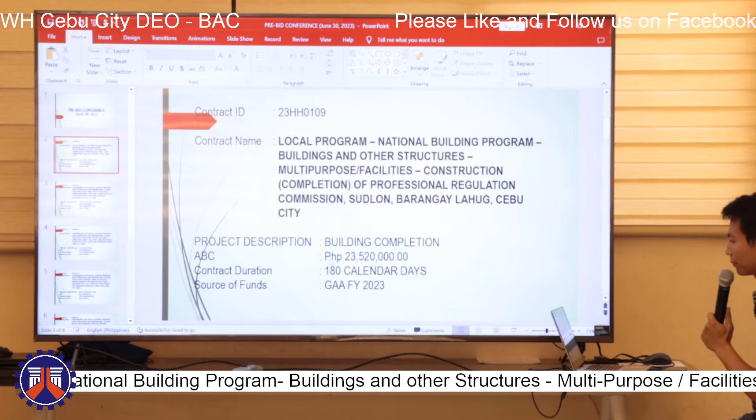Thank you, Ma'am Jared. For the first contract ID for today's pre-bidding conference, 23HH0109, Local Program, National Building Program, Buildings and Other Structures, Multipurpose Facilities, Construction of Completion of Professional Regulation Commission, Sudlon, Barangay Lahug, Cebu City. With an ABC of 23,520,000 and 180 calendar days for its duration.

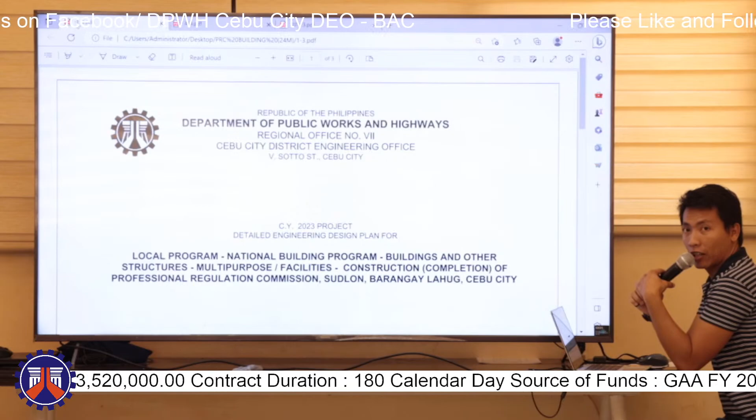The project is located in between the DENR and civil service building at Sudlon. This is the newly constructed PRC building, as of now the scope of the first previous contracts is still ongoing.

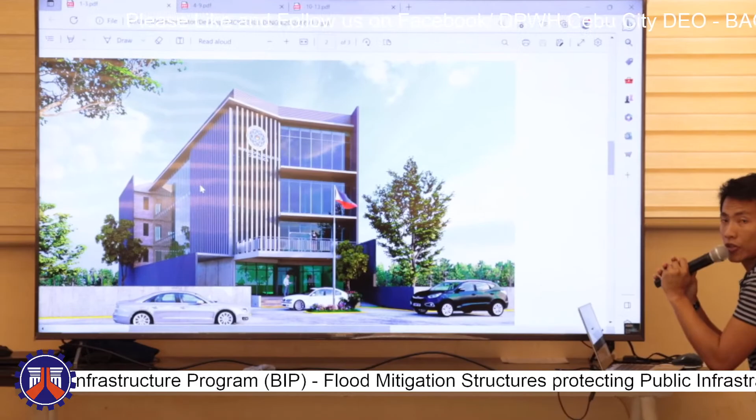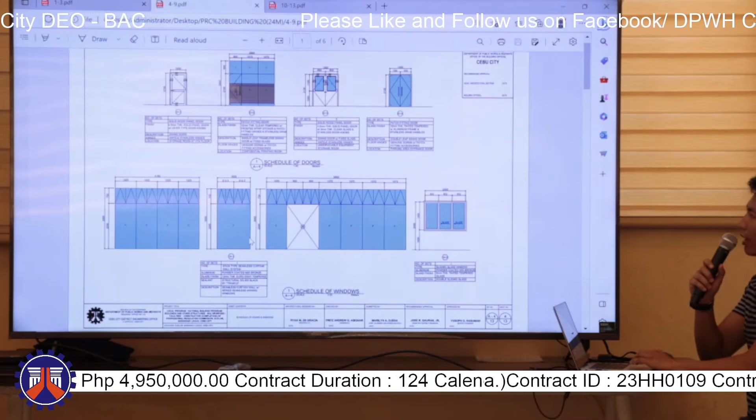So these are our scope of works for the finishing works: fabricated materials for aluminum glass window, sliding type, tempered glass door 12mm, aluminum glass windows for awning, glass wall 12mm, and wooden doors and windows. Let's go through the scheduling of doors and windows. This specifies the description of each door and its proper location.

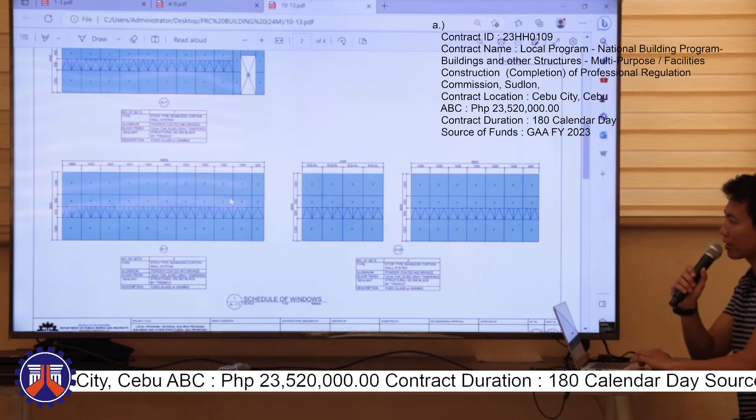Okay, so let's just look at the scheduling of doors and windows. That's it for the first contract, 23HH0109, completion of PRC building at Sudlon, Lahug, Cebu City. The ABC is 23.5 million.

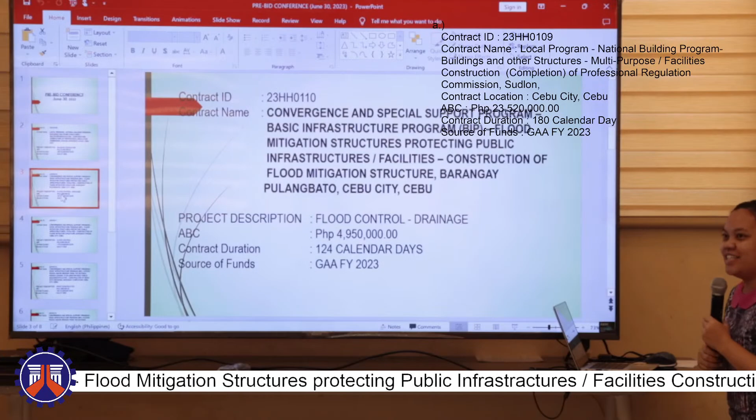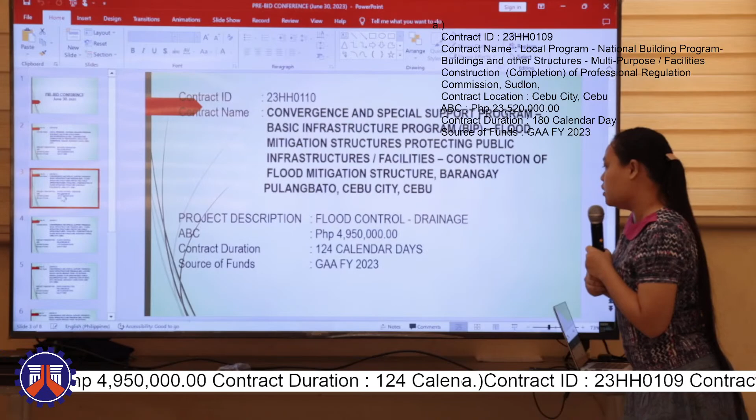Okay, for the next contract ID to be presented by Engineer Luna. Good morning, everyone. For contract ID 23HH0110, Convergence and Special Support Program, Basic Infrastructure Program (BIP), Flood Mitigation Structures Protecting Public Infrastructure Facilities, Construction of Flood Mitigation Structure, Barangay Pulangbato, Cebu City, Cebu. Project description is flood control drainage with an ABC amount of 4,950,000. Contract duration of 124 calendar days, source of funds GAA FY 2023.

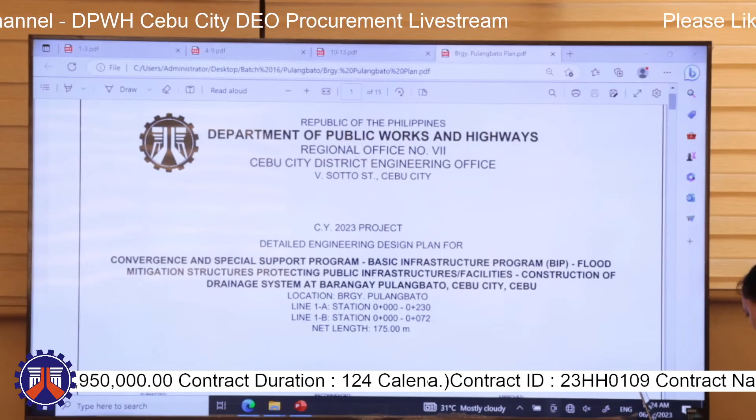So for this project, it consists of two line alignments: Line 1A, station 0 to 230, and alignment 1B, station 0 to 72, with a net length of 175 meters. For the location plan, our project is located along Pulangbato Kandarong Road. The alignment Lane 1A runs along the road, followed by construction of box culvert drainage with steel grating cover every 10 meters.

And the alignment 1B is construction of 48 inches RCPC. This will cross along the Gandarong Pulangbato Road. This 48 inches RCPC will cross there, heading towards the Butuanon River.

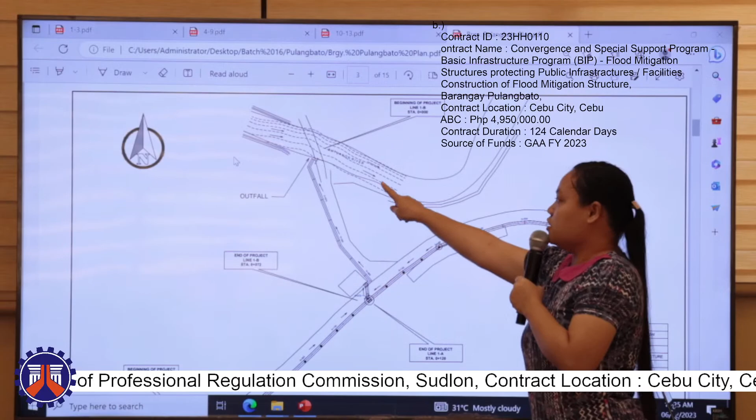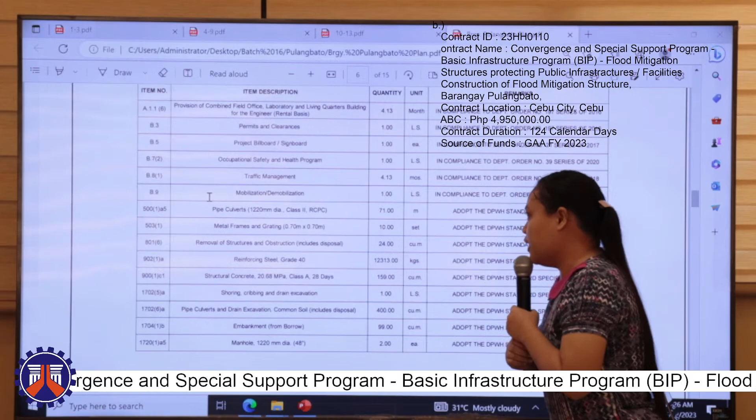For our outfall, to protect against scouring at the outfall, we will have a flared F-type headwall to protect the outfall. So the main quantities for our project in Pulangbato are reinforcing steel bars, structural concrete for the box culvert and steel grating, the 48 inches RCPC embankment, and we also provide shoring for the excavation of the project. That's the main scope of work for the drainage project along Pulangbato.

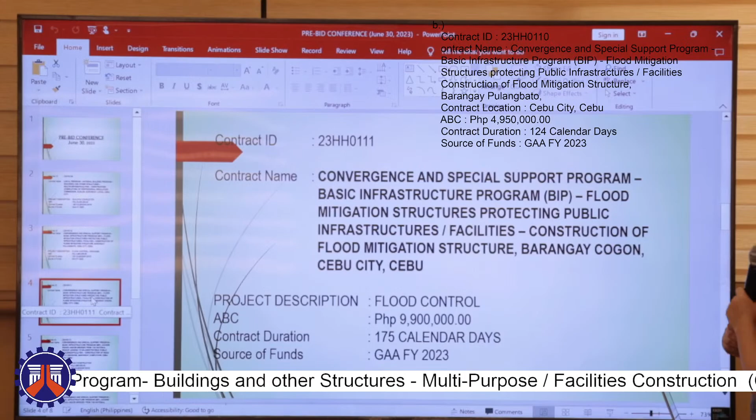So for the next project, 23HH0111, Convergence and Special Support Program, Basic Infrastructure Program BIP, Flood Mitigation Structures Protecting Public Infrastructures Facilities, Construction of Flood Mitigation Structure, Barangay Cogon, Cebu City. Project Description: Flood Control, with an ABC amount of 9,900,000 with a contract duration of 175 calendar days.

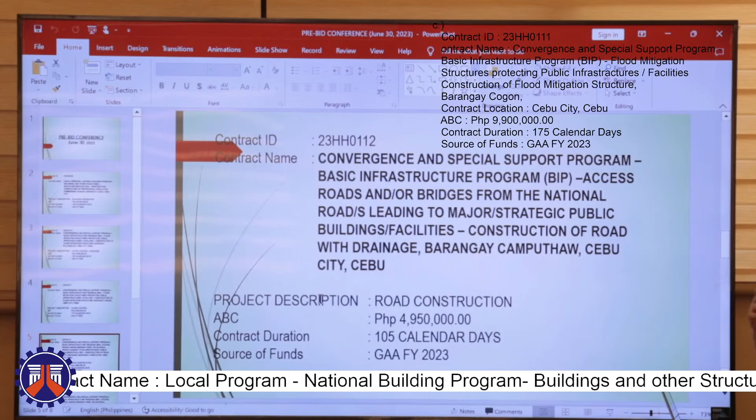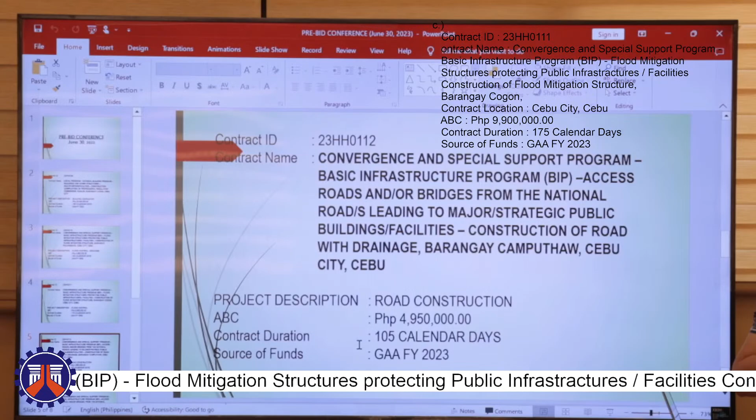So any questions from the contractor side? If none, I will give the floor to Engineer Oclaret Lorenzo for the next project.

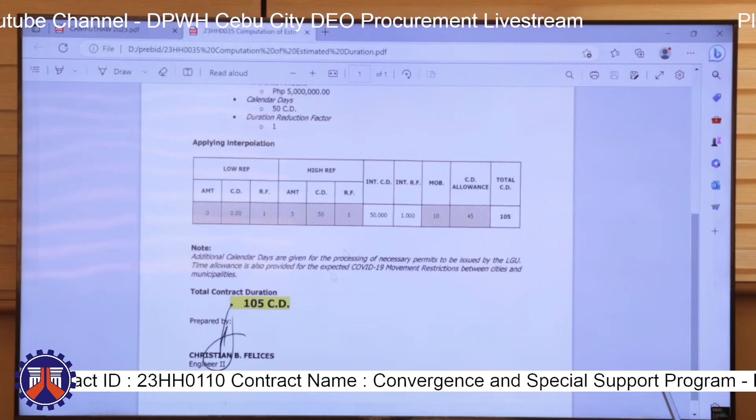Good morning, everyone. Before I will discuss the two projects, I will first discuss the computation of the calendar days. So as you can see here, our basis for the computation of calendar days, we have here DO44 series of 2012 for the standard construction duration of DPWH projects.

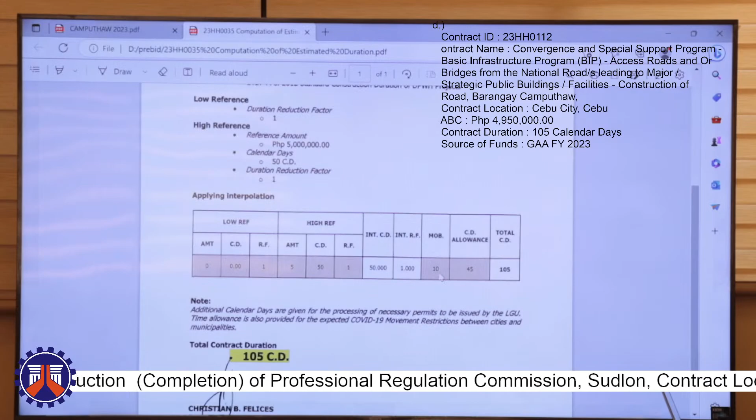And then aside from that, we also have additional calendar days for the MOB. For here, we have 10 days. And then we have an allowance here of 45 days, the same as Engineer Opla mentioned earlier: 15 days for the permits, and then additional 30 days for the COVID-19 requirement. So, for example, for a 5 million project, we have here a total of 105 days, including all the allowances, the MOB, the COVID-19, and then the permits.

So I think for Camputhaw, it is also the same for 105 days. Okay, so for contract ID...

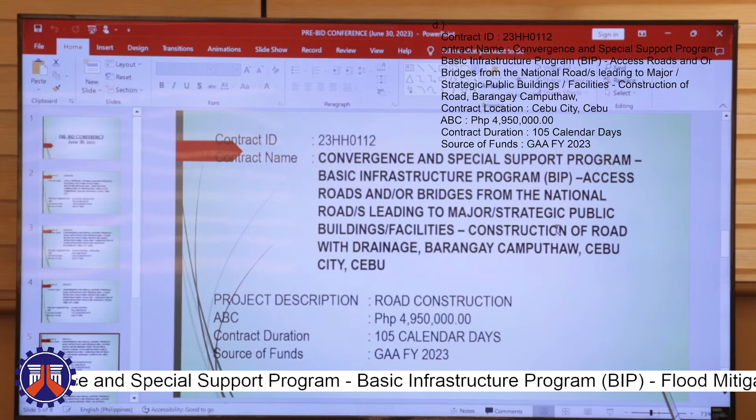23HH0112, Convergence and Special Support Program, Basic Infrastructure Program, access roads and or bridges from the national roads leading to major strategic public buildings and facilities, Construction of road with drainage, Barangay Camputhaw, Cebu City. So, the ABC of this project is 4,950,000 with 105 calendar days, the same as I mentioned earlier.

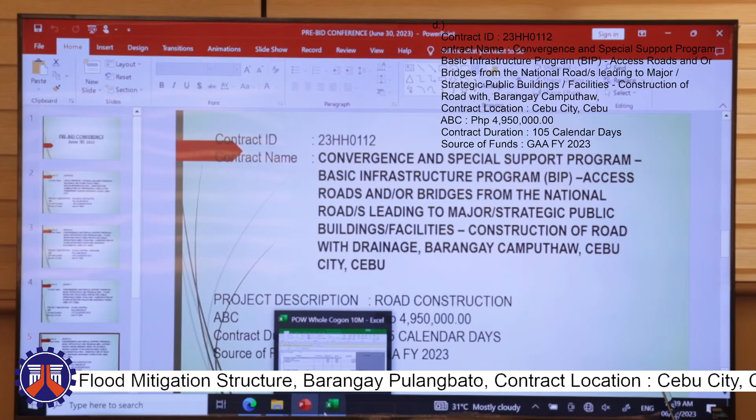So for the scope of work for this project, this project is a 250 thick PCCP for all throughout the stations, with stations ranging from 1 plus 00 up to 1 plus 145, with a total net length of 145 meters.

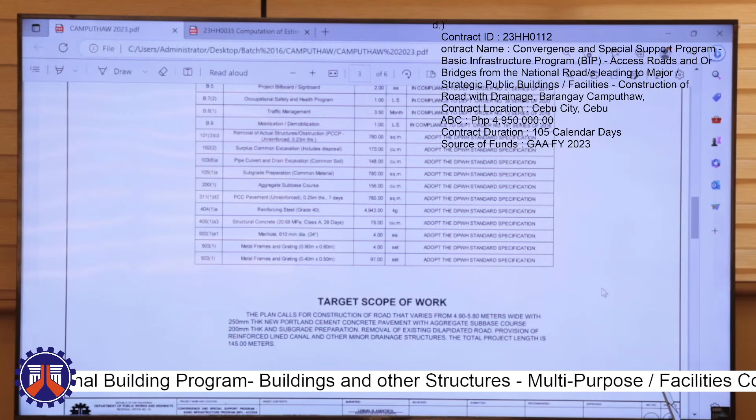So all throughout the project, we have the width that varies from 4.9 to 5.8 meters because it is from end to end, so it varies. And then the PCCP is 250 thick and the sub base is 200 thick.

So if you can see here, the items, we have the usual provision of combined field office, and then the permits and clearances, the project billboard, occupational safety and health program, traffic management, mobilization, and then we have a removal of existing concrete, 0.23 thick.

And then we have the usual surplus common excavation, and then pipe, culvert, and drain excavation for the reinforced line canal on left and right side.

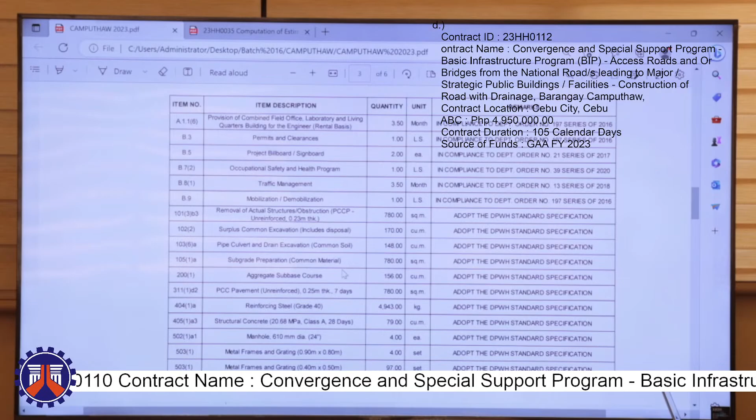And then we have the subgrade preparation, the aggregate sub-base course, and then the PCCP, instead of the usual 14 days curing, we have 7 days, because sir, the location is in the city, so we decided to use the 7 days instead of 14.

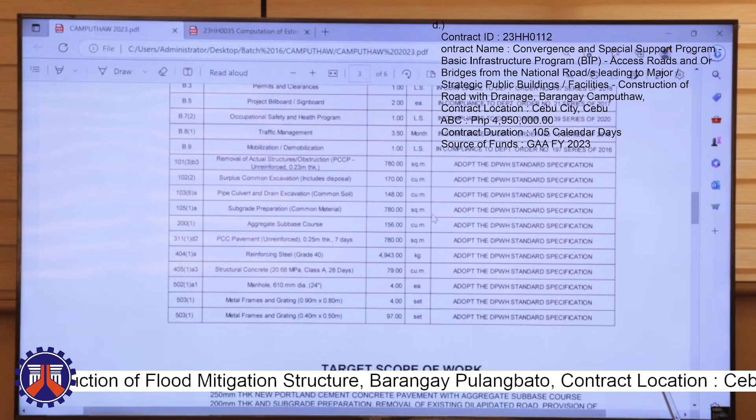Okay sir. And then we have here items 404 and 405, the reinforcing steel and structural concrete for the reinforced line canal. And then we have manholes here, 4 manholes for the existing cross drain, the cross drain is already existing in the site, while the manhole is to be constructed.

And then we have here metal frames and grating, 0.9 by 0.8 for the manhole. And then we have 0.4 by 0.5 for the cover of the reinforced line canal for every 3 meters. So that's it for the scope of work of this project.

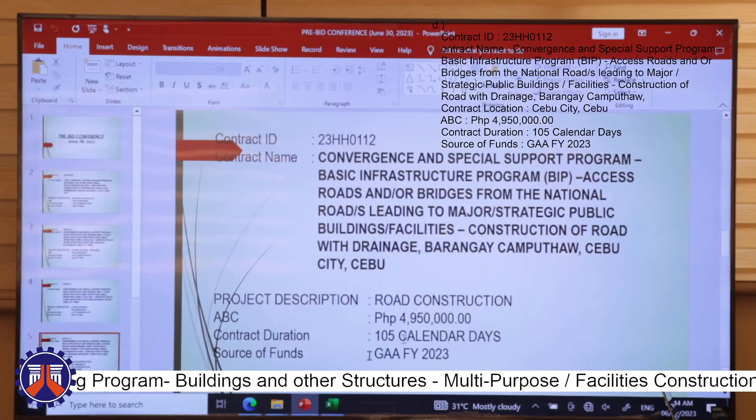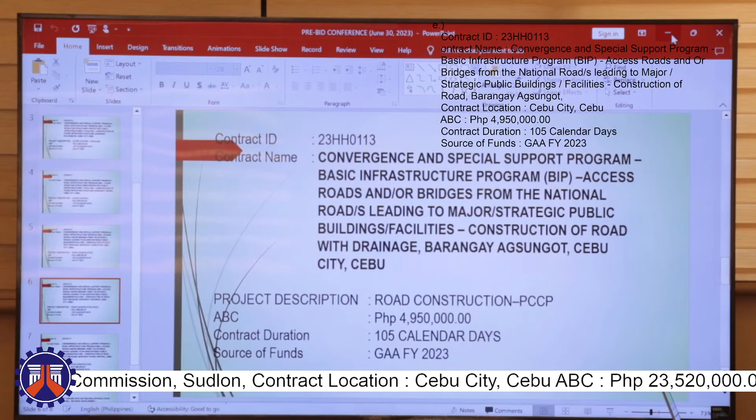So for the contract duration, as explained to Engineer Ruby, we have the same computations arrived. And then for the scope of work, this has a net length of 216 meters.

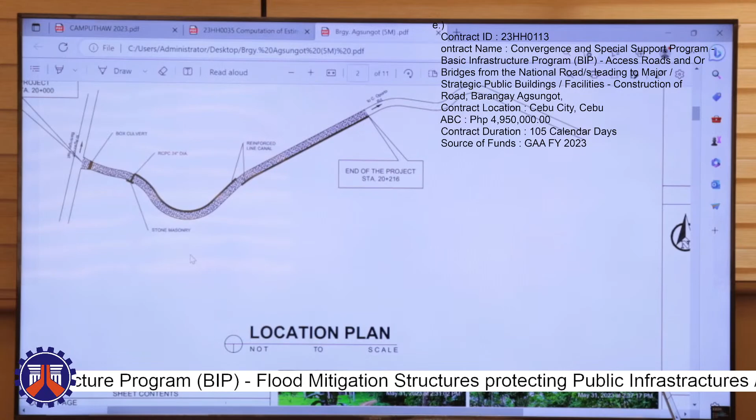The width varies from 8 meters to 5 meters because from the beginning, it is wide, so we transition from 8 meters to 5 meters. And then we have a single barrel box culvert here. And then we have a reinforced open line canal for the left side and then the right side.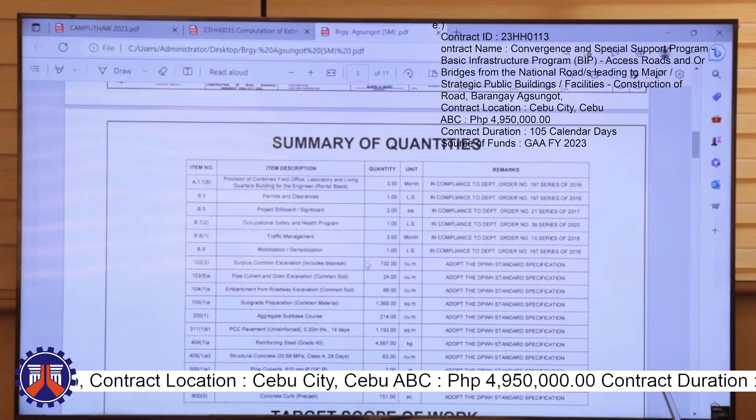So for the scope for the quantities: provision of combined field office, permits and clearances, project billboard or signboard, occupational safety and health, traffic management, mobilization, surplus common excavation, pipe culvert and drain excavation for the line canal and the RCPC, embankment from roadway excavation, subgrade preparation, aggregate sub base course, PCCP of 0.20 meter thick.

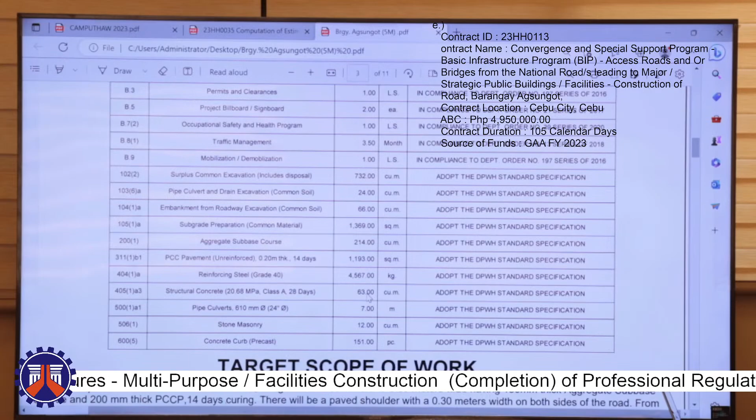And then 14 days is its curing. Reinforcing steel and structural concrete for the catch basin, reinforced line canal, and then for the single barrel box culvert, then pipe culvert, which is 610 mm, then stone masonry, and then concrete curb.

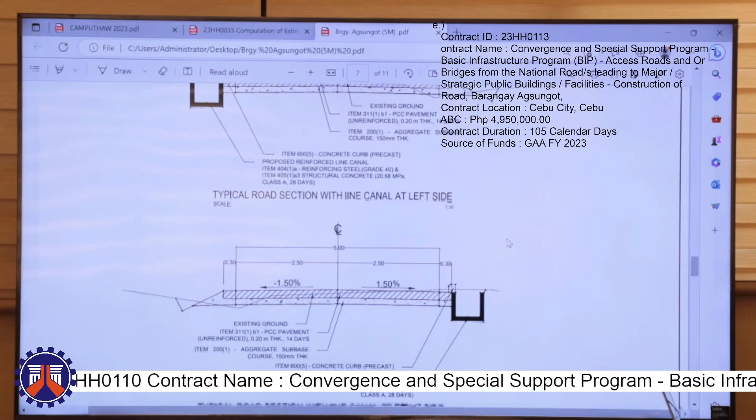Any questions? Okay sir, next time. Next time sir, we will appeal and present the equipment sir.

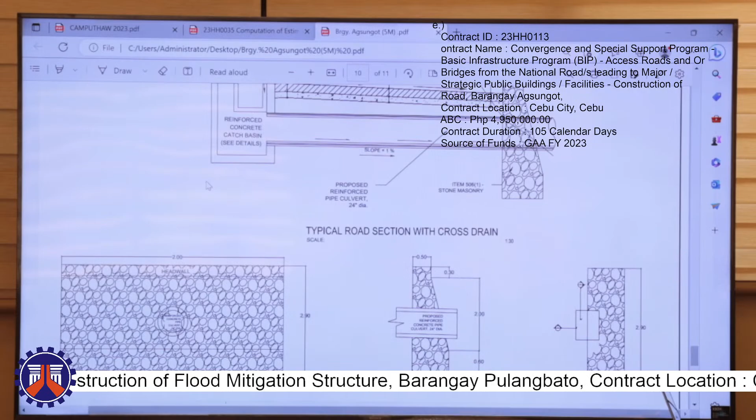Okay, and then Engineer Ruby will explain the Barangay Pahina Central. So good morning again. Now, I will discuss contract ID 23HH0114, Convergence and Special Support Program, Basic Infrastructure Program, access roads and or bridges from the national roads leading to major strategic public buildings, facilities, construction of road with drainage, Barangay Pahina Central, Cebu City, Cebu.

So, with an ABC of 4,950,000 and 105 calendar days. So this is the same also with the same calendar days computation with the previous two projects.

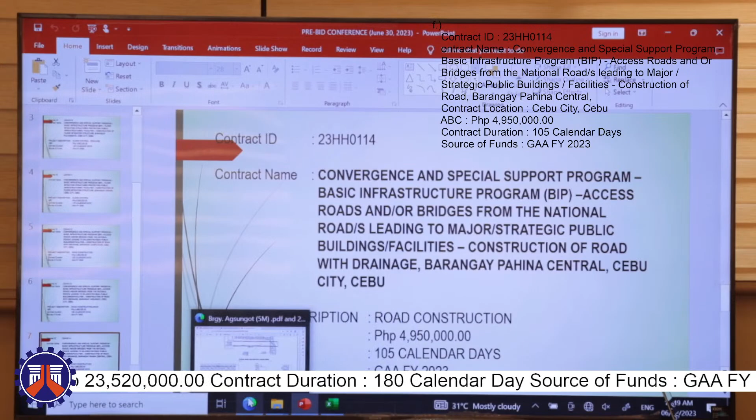So this project has station limits of 2 plus 800 up to 2 plus 947, with a net length of 147 meters. As you can see here with the location plan, this is located in Panganiban Street, between Sanciangko Street and Colon Street.

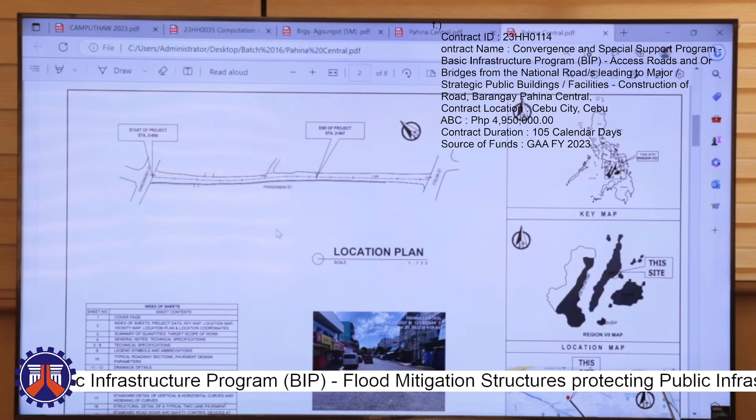For the typical cross-section of this project, we have an existing line canal on the left side. For this project, we will construct a line canal on the right side with almost the same specs as the left side. So I will proceed with the summary of quantities for the items.

With the usual provision of combined field office, permits and clearances, project billboard, signboard, occupational safety and health program, traffic management, mobilization, demobilization.

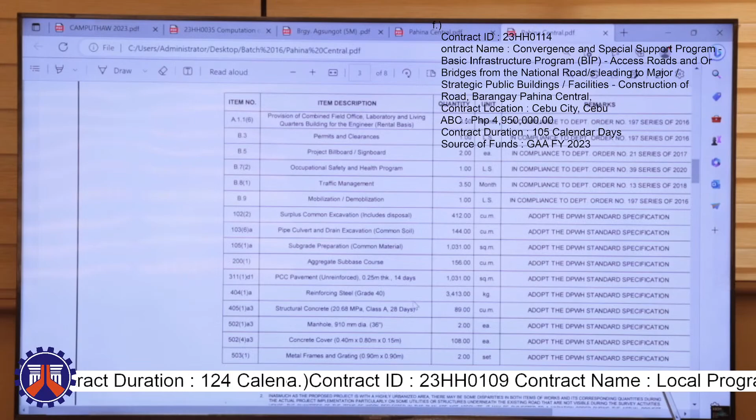Surplus common excavation, pipe culvert and drain excavation for the line canal and the manholes, and then subgrade preparation, aggregate sub-base course, and then for the PCCP, we have 0.25 thick and 14 days curing since this is on the city side, so 0.25 thick.

And then we have items 404 and 405, reinforcing steel and structural concrete for the reinforced line canal. And then we have here...

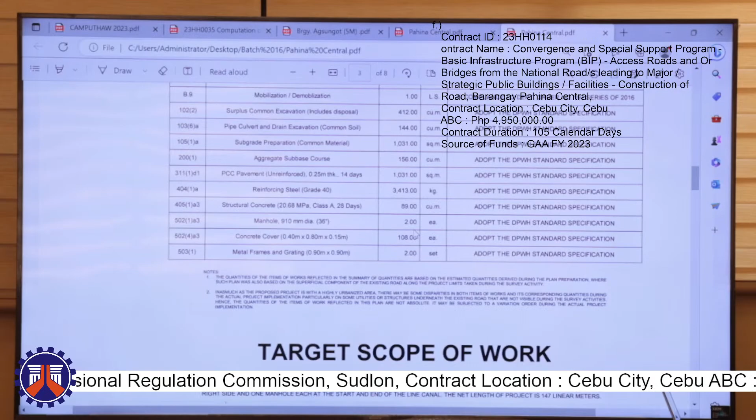910 millimeter diameter for the manholes, one for the beginning and then the end of the project on the right side for the reinforced line canal.

And then we have here concrete cover of 0.4 by 0.8 by 0.15 as cover of the reinforced line canal every 3 meters, spaced at 3 meters spacing.

And then we have here metal frames and grating 0.9 by 0.9, two sets for the manholes.

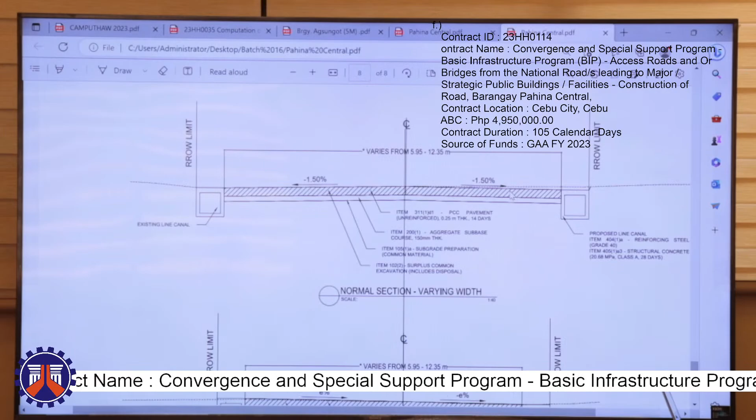Here is the typical cross-section for the project with width that varies from 5.95 up to 12.35, including the start which has a bigger width.

So do you have any questions from the contractor side? That will be all. Thank you.

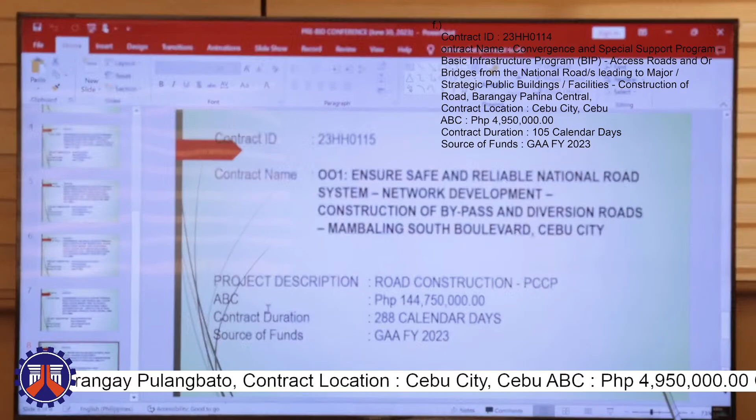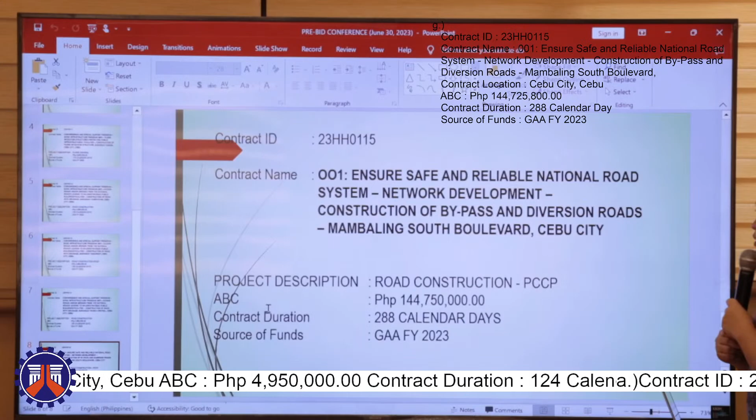So for the contract ID 23HH0115, contract name 001, ensure safe and reliable national road system, network development, construction of bypass and diversion roads, Mambaling South Boulevard, Cebu City. Project description: road construction, PCCP, with an ABC amount of 144,750,000. Contract duration is 288 calendar days.

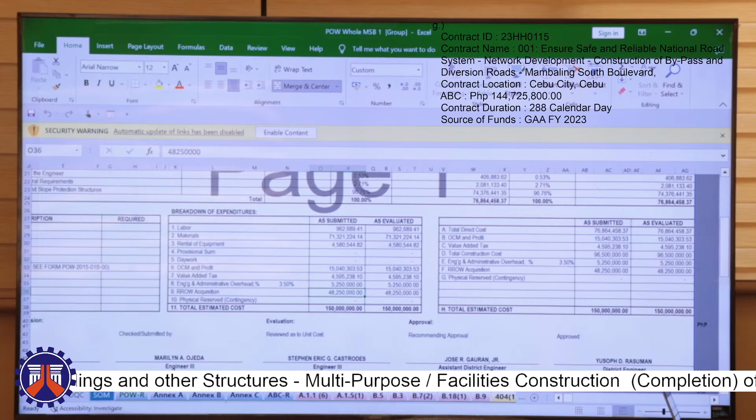So that's all for the side of the planning and design section.